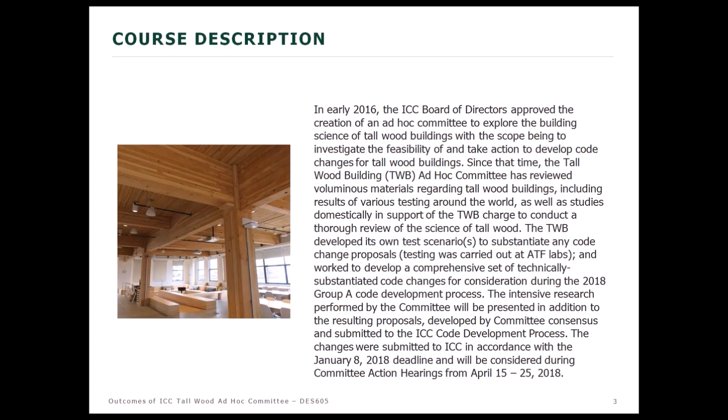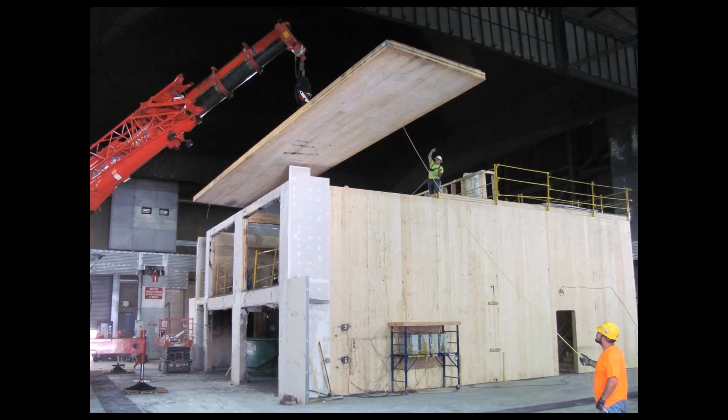And the one shown in the previous slide was a 7-ply CLT slab, about 10.5 inches thick. So they're prefabricated, solid timber slabs that are brought to the site and put into mass timber buildings. I love this photograph of engineers with Lend-Lease Corporation actually setting one of these CLT panels or slabs on top of the test facility, on top of the CLT structure that was tested at the Bureau of Alcohol, Tobacco, and Firearms.

So just a little information about the development of CLT. It is a new product. The important part of the information on this slide is that it really came into use not until after the turn of this century, so in the early 2000s, and its development was driven by environmental advantages of building with wood, carbon sequestration, sustainability, it's a renewable resource, and certain construction efficiencies, better weight to strength ratios, and so forth. There are already over 500 CLT buildings in England, by the way. Far fewer in the US so far.

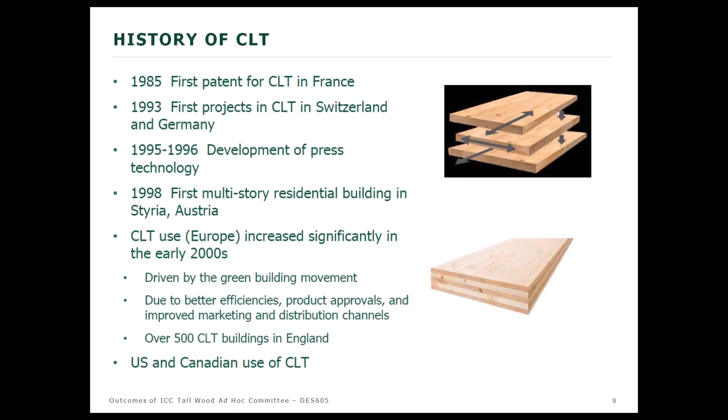Intuitively, the fire resistance of mass timber wall or floor slabs protected with gypsum are going to be much different than repetitive member light frame assemblies. The earliest testing conducted of CLT for an exterior wall confirmed that the fire resistance is very different. One layer of Type X 5/8 inch gypsum on a 3-layer, or I believe 5-layer, CLT panel achieved a 3-hour rating. So you can see how that's very much different than typical light frame or even typical traditional heavy timber.

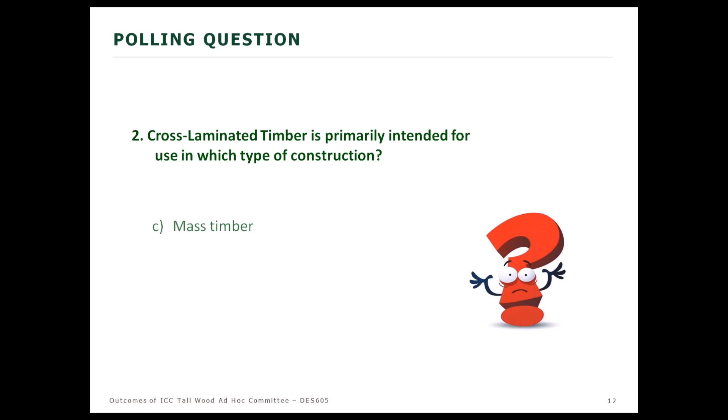I should have mentioned before, Paul's right that the product cross-laminated timber is permitted to be used in type 3, 4, and 5 in various parts of the structure. And in fact, since it's considered heavy timber in the 2018 code - the hearing was in 2015, the code was 2018 - since it's considered heavy timber, there are uses in types 1 and 2 where it can be configured.

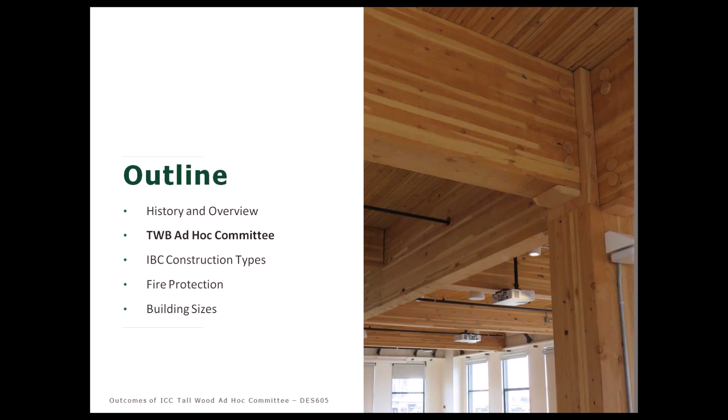However, the Tallwood Ad Hoc Building Committee is what we're here to talk about. The ICC board established this ad hoc back in 2016, frankly at the request of the American Wood Council. We actually made the request much earlier. It went on for quite a while. The committee was appointed in December.

The ad hoc committee was created to study the science of tall buildings of wood construction, look at the data, look at existing examples, and if convinced, take that information and create code change proposals. The ad hoc itself consisted of representatives from building construction materials industries, building and fire code officials, architects and engineers, fire protection experts, and other scientists, researchers, and related stakeholders.

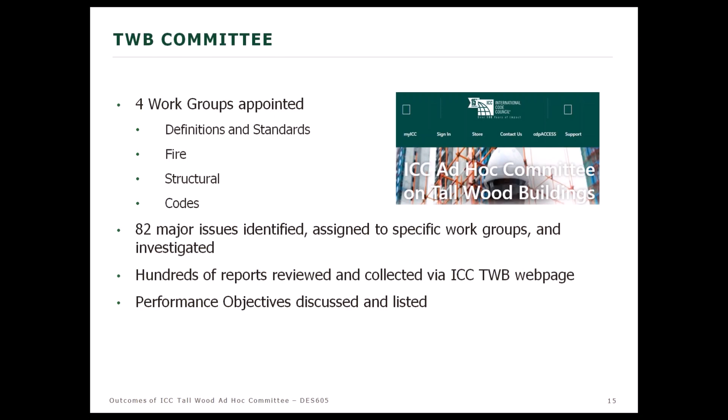And we had presentations for the Tallwood Ad Hoc. And finally, before we got deeply into the data collection and so forth, we had a discussion of performance objectives. What were we going to do? And we identified performance objectives to be met: no collapse under reasonable scenarios of complete burnout.

Complete burnout of the fuel source without automatic sprinkler protection being considered. No unusually high radiation exposure from the subject building to adjoining properties, and no unusual response of the subject building from typical radiation exposure from adjacent properties.

So it should neither transmit nor receive, or behave adversely under normal kinds of exposure. No unusual fire department access issues, internally or externally. Egress systems designed to protect building occupants during design escape time with a safety factor, and highly reliable fire suppression systems to reduce risk of failure during reasonably expected fire scenarios, with reliability proportional to evacuation time.

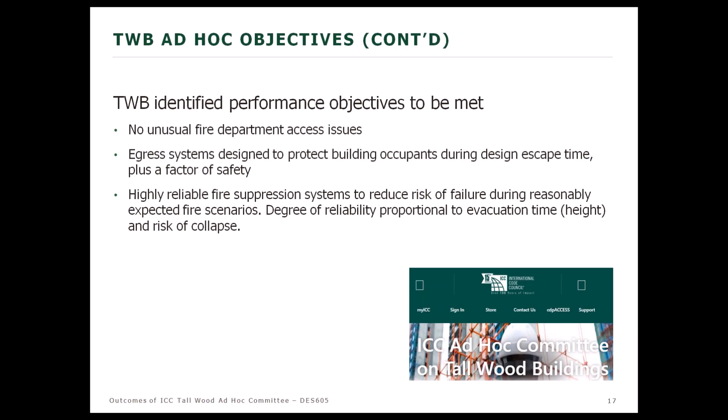Specifically, our biggest concern, and that which we heard from most people about, height. And lastly, risk of collapse. It's important to note the Tall Wood Building Ad-Hoc Committee has determined its comprehensive package of proposals meets these performance objectives. The TWB believes that all of those performance objectives that I just read off are met by this package of proposals. So let's get busy and take a look at some of this.

Before we do, much of the work that Tall Wood Building Ad-Hoc Committee did is predicated upon testing, and among other things, after we reviewed tests by a lot of people, researchers in private industry and in universities around the world, we knew we needed to do our own set of tests. So the fire work group of TWB created a fire test scenario.

A two-story condo, full scale test, 30 by 30 foot interior dimensions, corridor and stairs included. And most importantly, the fuel load was going to be what has come to be known as the UL modern furnishings kind, particularly polyurethane foams and other plastic materials.

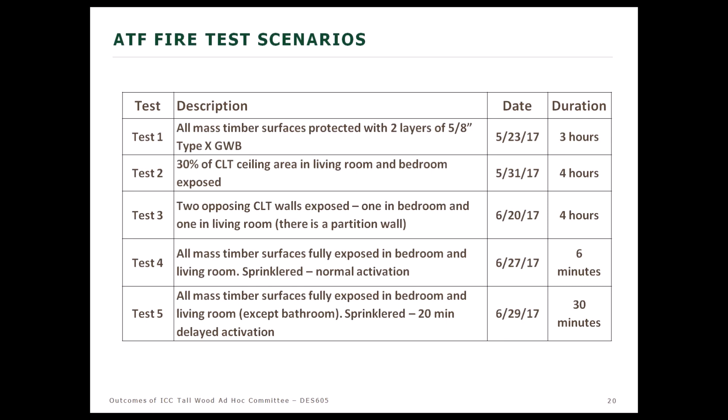So the fire work group created this fire test set of scenarios. You see in this table 5 tests. These outcomes and the program today are predicated on that, and we had hoped that you all would have availed yourselves of the fire test webinar a couple of weeks ago, and the adhesives webinar also a couple of weeks ago. But since we all have real jobs and other commitments, I'm going to review much of it right now. That's why you're seeing the test scenarios.

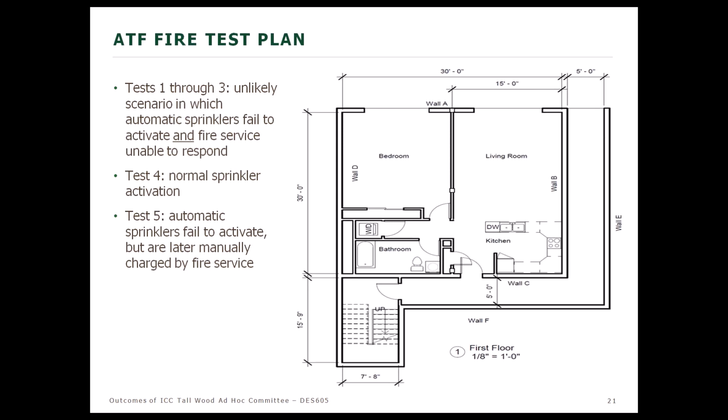Here's the plan, the building plan. This was full scale, so this is a real life example. It's a 1-bedroom condo, 2 stories. There's a corridor around it and a stair connecting the 1st and 2nd floors, both of which were fully instrumented. In fact, we collected, I believe, 420 channels of data. There's a huge amount of data.

If you're a geek and you want to look at that stuff, the report is available on our website, it's the mass timber, awc.org/tall mass timber website. That report's available, look at it. Lots of discussion about all that data. It's an inordinate amount.

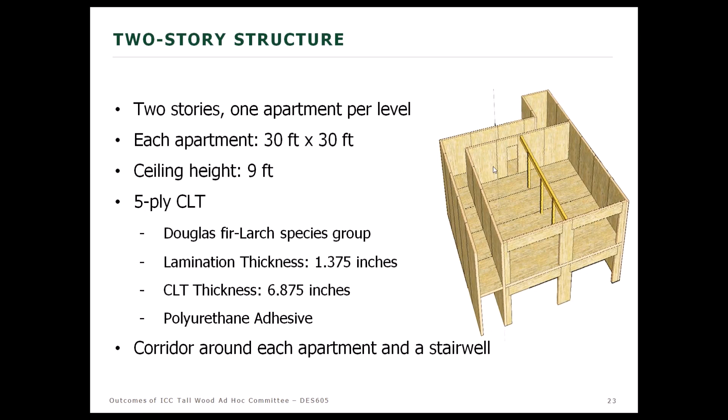In a perspective here, you see panels of CLT constituting walls and floors, but on both the 1st and 2nd floor, there's a center bearing wall, and we used a beam and columns of laminated timber, which is all large enough to qualify as mass timber. So we had all of these kinds of mass timber, and we had different connections that we looked at in that configuration.

So the size, the occupied space is 30 by 30. The kitchen and living room side is 15 by 30, bedroom and bath side 15 by 30. Ironically, later on I'm going to mention the NFPA FPRF tests that were done at NIST, and one of the reasons our size was chosen this way is because the FPRF tests were 15 by 30, so that there's some correlation we could draw.

Everything in that compartment complies with the IBC or code proposals that the Tall Wood Building Ad-Hoc is putting forth. That's an important consideration. For example, there's a 20-minute door from the dwelling unit into the corridor, a 90-minute door at the end of the corridor into the stairwell. All of those issues are dealt with. At one point, we put OSB on top of the non-combustible floor as a floor finish, so that the fuel loads and so forth are all replicated.

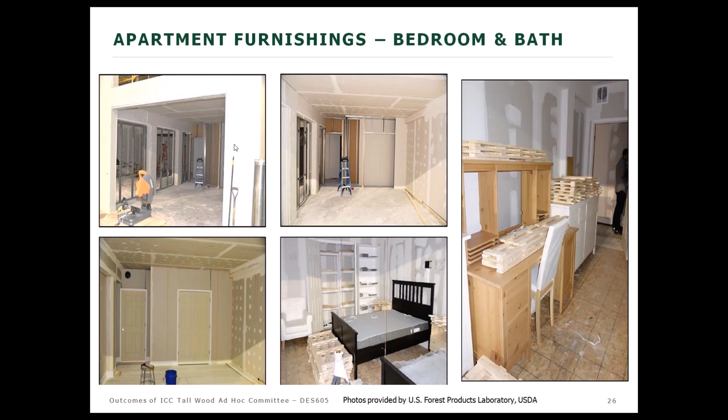Here's the bedroom side. For fire test number 1, all the mass timber surfaces were protected with 2 layers of 5/8 type X. Sam, you're going to go through the 5 tests here.

Sorry to interrupt. You may need to pick and choose which details of each test just to keep us moving.

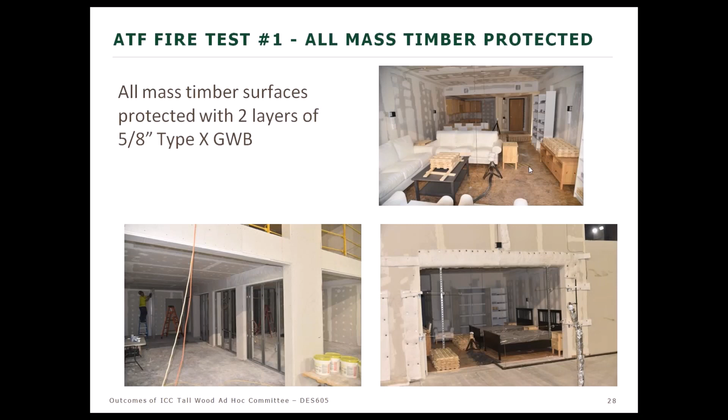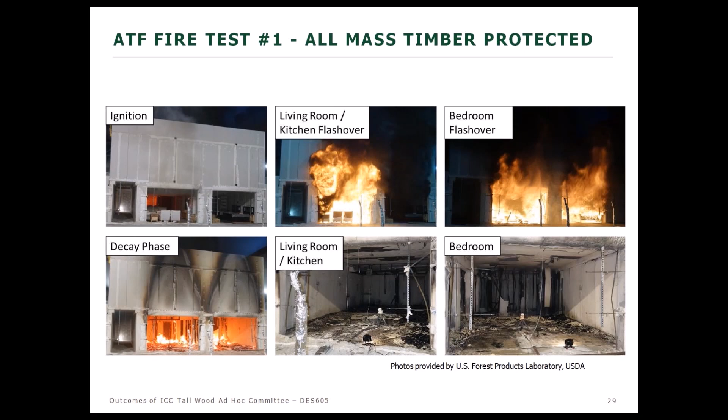No worries. Here we are, this is test 1. There's the 23 megawatt fire when both the bedroom and the living room have flashed over. In the bottom right, you see the fuel was consumed, nothing left but ash and soot. It was allowed to run without intervention by people or sprinklers for 3 hours. That's what was left, and you'll notice the gyp is still attached.

Fire test 2 was one where the ceiling was partially exposed. I failed to mention earlier that on that website, Tall Mass Timber, at awc.org/tallmasstimber, you can find video of all these tests. In fact, you can find the entire fire test presentation that we did a couple of weeks ago.

But I do want to run this, this is fire test number 2. You can see the exposed ceiling right there. There's instrumentation trees there and back there.

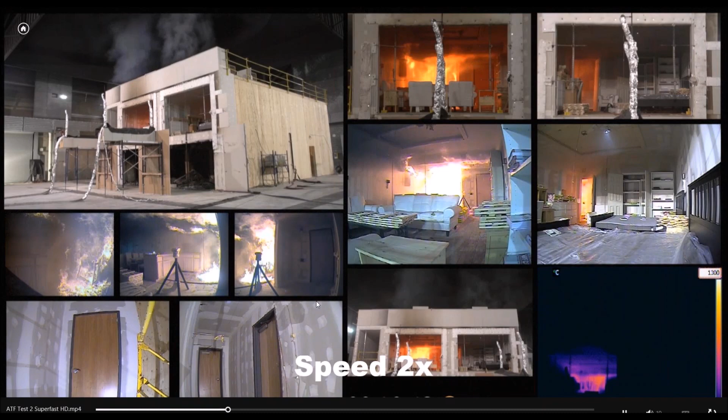Kitchen's involved, the living room about to flash over. Living room has flashed over. The flames have migrated to the bedroom. It's about to go. I'd like to leave it on this for a moment because you get to watch the off-gassing in those urethane mattresses. But let's move ahead. The bedroom, not yet. There it is. Now we're all flashed over.

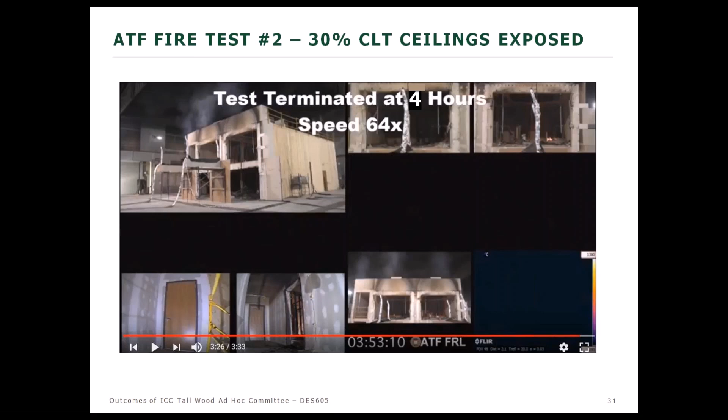In each of these fires, the fire itself at its peak was somewhere between 21 and 23 megawatts. It was allowed to burn itself out without any intervention, no sprinklers, no people, as you can see occurring here. I'm going to advance to the end so we can get through, because I need to get to the end without spending too much time on these things.

By the way, it was loaded with water barrels on the upper level in order to generate the full expected live load. There's the exposed ceiling before the fire.

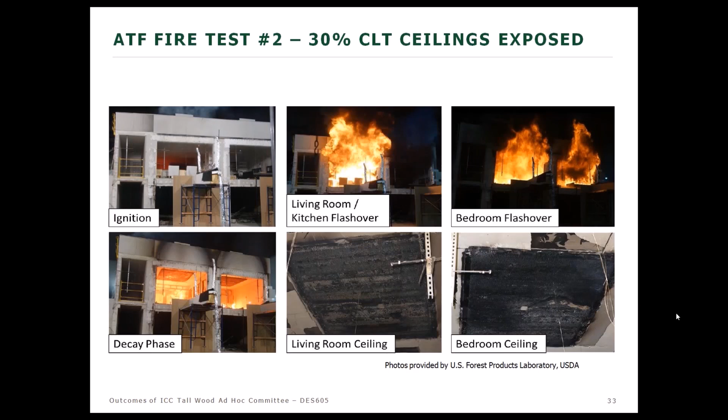Here are the excerpts from that video I just showed you, including some close-ups of those exposed portions of mass timber. Before all of this started, the Research Institutes of Sweden, known as RISE, had gathered data from a number of sources, including that test many of you are familiar with that was conducted at NIST on behalf of FPRF. They had lots of data, and they created a model.

Given our information about the test assembly, their model predicted the heat release rate, the solid black line here. The blue line is what we measured at ATF. This is for test number 2. That's pretty fair correlation.

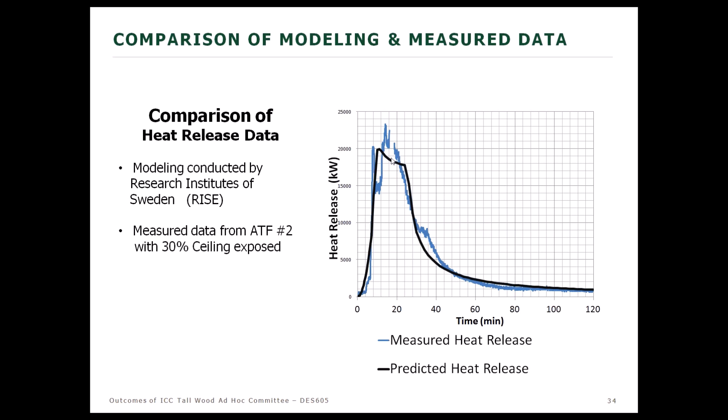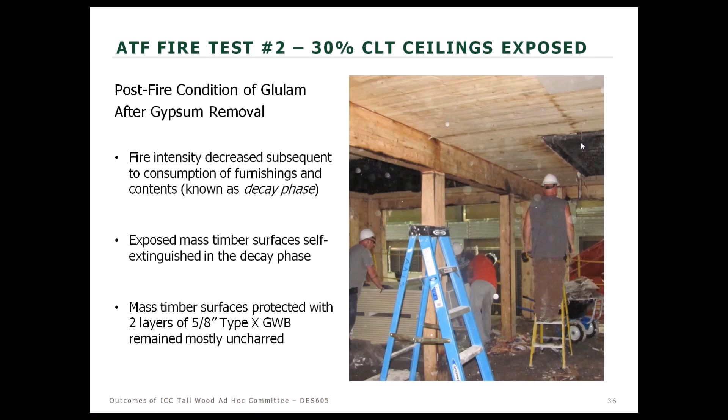So here is that room. This is the bedroom side. That's the kitchen over there with the exposed ceilings. There's that beam and column after that huge fire you saw, with the gypsum removed. So there's the exposed ceiling.

A little better view is pure sideways. Unfortunately, on the ride home from Beltsville, Maryland, it knocked some of that char off. This is the same piece with the char that's been removed by highway oscillation.

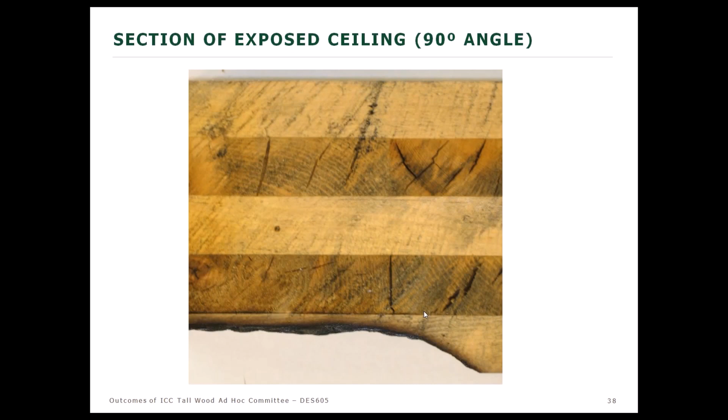And as you can see, the first lam, the char proceeded almost through the first lam. Here's the second lam, third, 5 lam system.

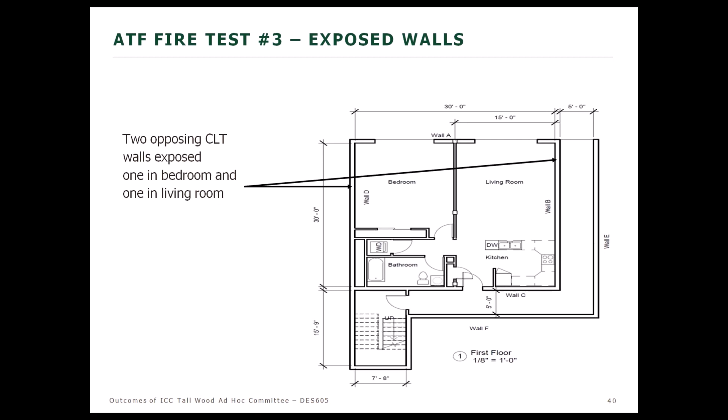Fire test number 3, similar to test 2, only this time the walls were exposed. These are the openings, and the cameras are all set up out here. You're looking in at the outside wall of the living room and the outside wall of the bedroom. This interior partition is the column and beam partition, and those spaces were infilled with non-combustible material, in other words, light gauge steel studs and gypboard.

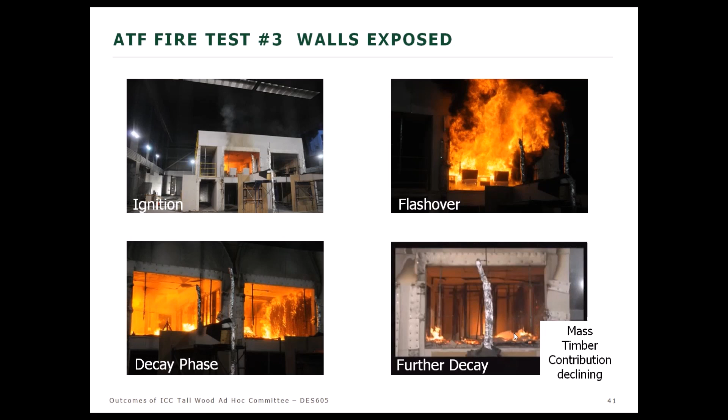Test 3 was run, flashover on both sides. The fire continued to the decay phase, and with the exposed walls, they became involved in the fire, as you can see here. But as the decay proceeded, you'll notice that flame simply diminishes, and our test instrumentation would suggest it continues as far as self-extinguishment, but that's a whole other topic.

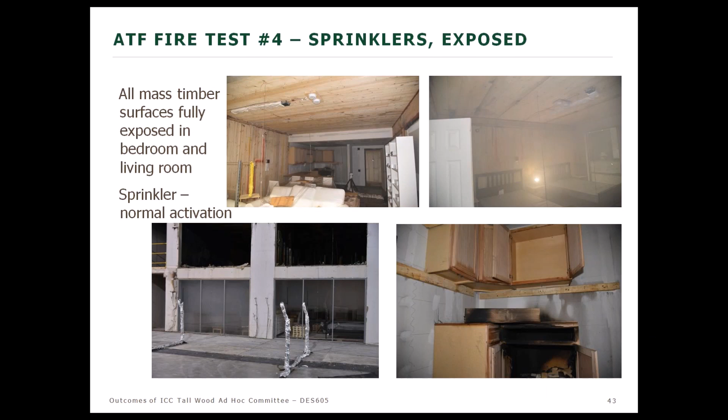It wouldn't have been that bad, except that ATF uses a gasoline-soaked rag in a kitchen cabinet, and then they close one of the two doors. It's a protected fire, so the sprinkler can't get immediately at it. So it's an interesting phenomenon that so little damage was done, even in the case of a protected fire.

Fire test number 5, fully sprinklered, all mass timber surfaces fully exposed. But what if somebody accidentally turned a valve off and the sprinklers didn't work? What happens if all that mass timber gets involved in the fire?

For this test, it was decided that we would install glazing in these openings. So there are 3 panels of glazing, living room side, bedroom side, and the corridor door was left open in order to generate a sufficient amount of oxygen.

But it wasn't growing at a great rate, so at about 17 minutes, the fire service took a pike pole and knocked out the glazing panel here on the lower right-hand side. So the fire then took off.

It got flashover in the kitchen, right at scientific flashover. We had defined flashover, the engineers from FPL and from ATF, as 600 degrees at 4 feet from the ceiling, with more than 2 thermocouples having to register that amount. So anyway, it was near flashover in the living room and in the bedroom.

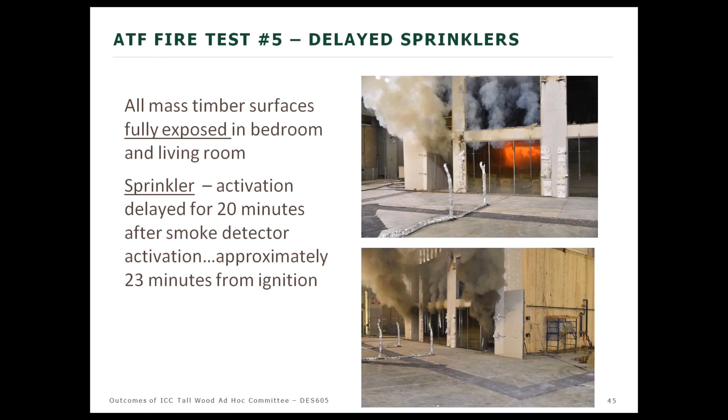Let me back up one here. The fire grew quite large. The sprinklers went off, but they were delayed for 20 minutes after the first sprinkler head would have gone off. The lab valved off the water to those sprinkler heads. 23 minutes after ignition, it was permitted, and the result was it extinguished the fire, even though this was all exposed mass timber, no protection of any kind, and it was allowed to get a pretty healthy start up to around flashover.

So having reviewed that, a poll, if you will, Brian. Which of the following is not one of the tall wood building ad hoc performance objectives? A, no collapse under reasonable fire scenarios. B, no unusual fire department access issues. C, egress systems protect occupants during escape. Or D, occupants protected without leaving the building initially.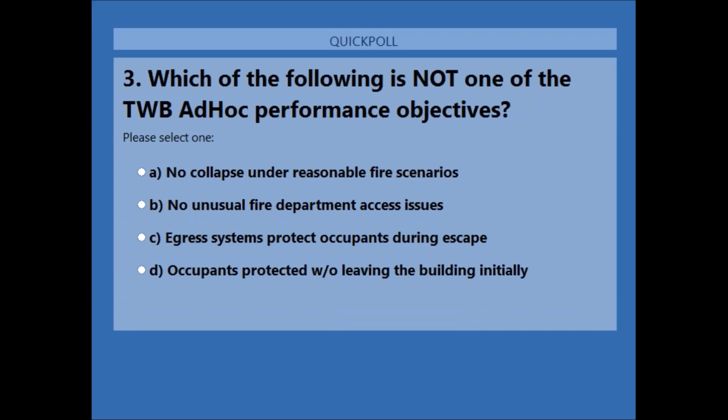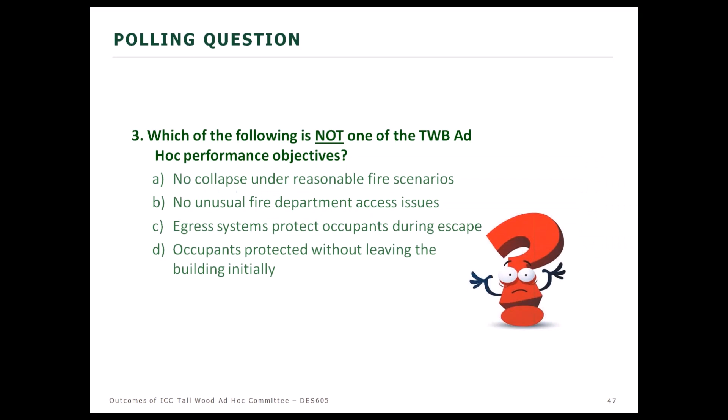I'm going to go a couple more seconds and close it out now. Let's take a look at the results. Looks like most people are leaning towards D, occupants protected without leaving the building initially. What do you say, Sam? Occupants protected without leaving the building initially was not one of the ad hoc's performance objectives.

Okay, so let's look at the types of construction that came from the ICC Tallwood AdHoc Committee's deliberation. There were 15 code change proposals, and we wound up deciding that 3 new types of construction made sense. As a result, there would be new entries for height in feet, height in stories, area, and a whole passel of other requirements for safety, including safety during construction.

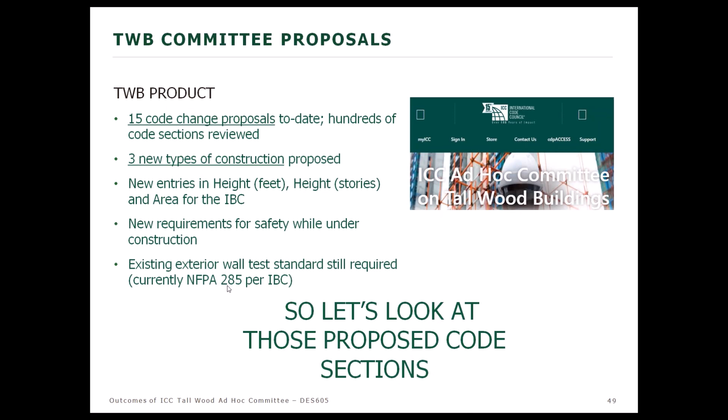I left that a little quickly. I wanted to point out that the fire work group had a subcommittee to look at exterior wall tests. Currently, NFPA 285 is required in 1405 for exterior walls, and for a variety of reasons it was determined by them that the requirement would stay with NFPA 285.

Okay, so the first thing that had to happen was we created some definitions, and like everything else that the work group or the AdHoc worked on, this changed over time. So we had to go back and fix some things, but here are the definitions. First one is mass timber. That's solid built up, panelized, or engineered wood products that meet the minimum cross-section dimensions of type 4 construction.

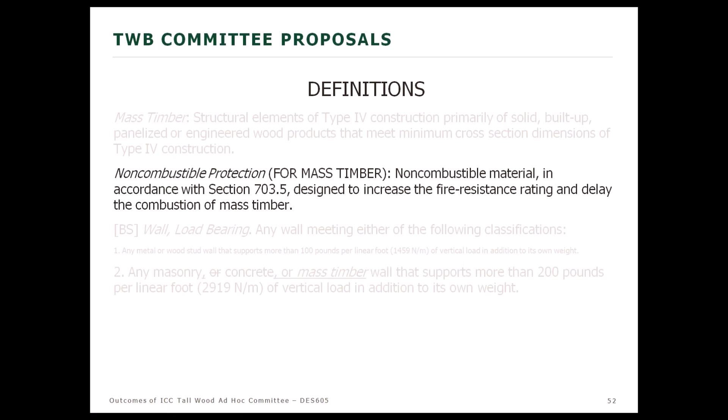Non-combustible protection for mass timber: this is non-combustible material in accordance with 703.5, designed to increase the fire resistance rating and delay the combustion of mass timber. And then we had to add this in because in Table 601, some requirements are for load bearing, some for non-load bearing, so you need to know which is which.

It was determined to add mass timber in definition number 2. The old wood always fell under definition number 1, a wall that supports 100 pounds per lineal foot of vertical load in addition to its own weight. Mass timber got added into number 2, masonry, concrete, or mass timber wall that supports more than 200 pounds per lineal foot of vertical load in addition to its own weight.

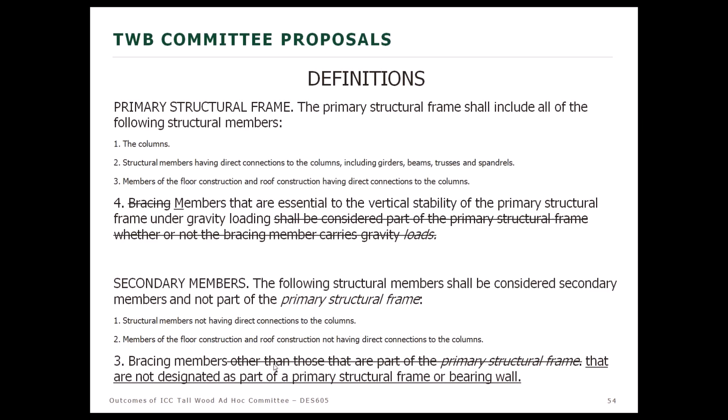And you'll see that the AdHoc drew other comparisons to masonry and concrete. So primary structural frame got modified to accommodate mass timber. Secondary members got modified here in item 3 to accommodate the mass timber. These are proposals - when I say got modified or the table changed, I'm talking about the current existing proposals in G108 that's on the table in the ICC Group A process.

The AdHoc looked at this and said, hey, looking at all this data from around the world and hearing various presentations, that there are basically 3 kinds of mass timber buildings. There's this type, which is where the mass timber is completely protected with non-combustible protection, which provides 2/3 of its required fire resistance rating for building elements in Table 601. We called that 4A.

Then 4B is mass timber with portions of that type A protection omitted. 4B is like 4A, but unprotected areas are permitted. There are limits on how much can be exposed and limits on how close various exposed areas can be to one another. Then there's 4C, with basically no requirement for non-combustible protection except certain features I'll touch on later.

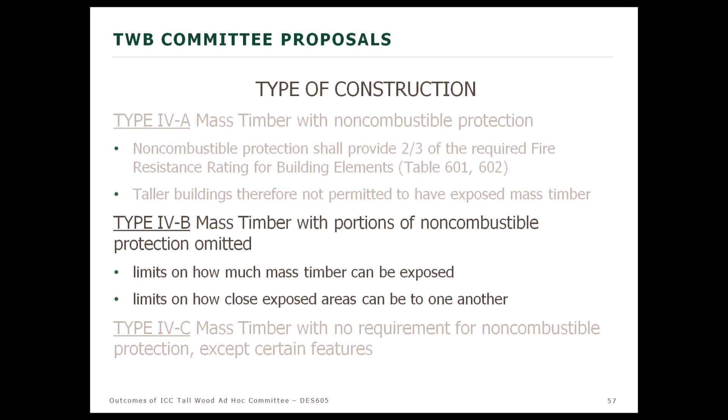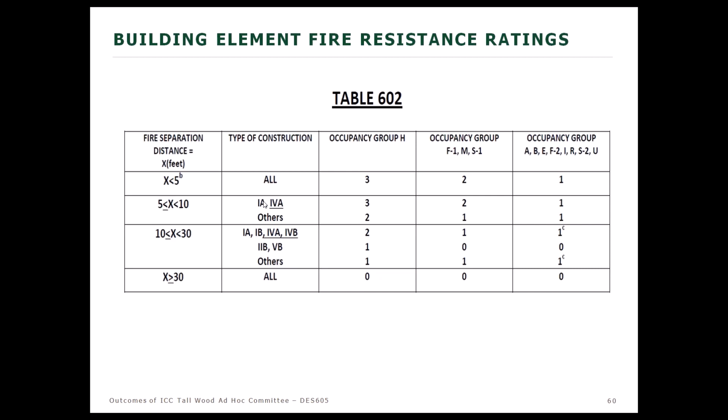Table 602 - bearing in mind the 4B, 1B relationship, we went to the table here, 602, and said okay, wherever 1B appears we'll add 4B, wherever 1A appears we'll add 4A, as is the case in these two lines. That was the basic premise from which all of the Tallwood building AdHoc work sprang - that 4B was equivalent to 1B, except that 4B is combustible material and accommodations need to be put in place to accommodate that particular aspect.

All right, so other important features: each type of construction is based on test conditions in that fire test that we looked at back there at ATF. The test plan was developed by the Tallwood Building Fire Work Group. The test plan included various generic connections that were recommended by the structural work group to be tested - I think there were 7 generic kinds of connectors in that test. And lastly, both panel mass timber, CLT, and other mass timber, glulam beams and columns, were tested.

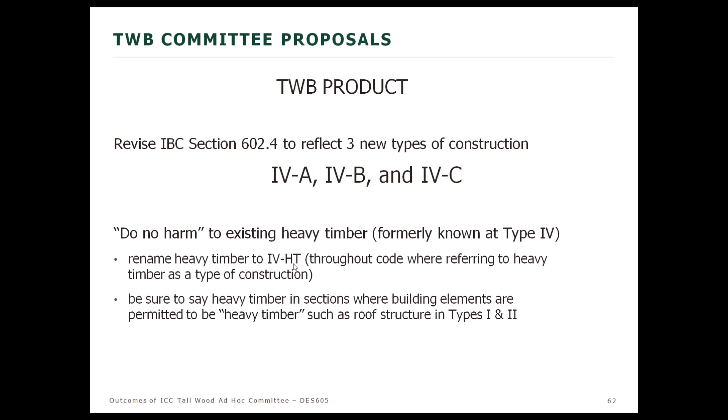So the first thing in the product of the ad hoc is do no harm to the existing heavy timber requirements. The old 602.4, which was just heavy timber, became 602.4.4 in the new scheme and is called type 4 HT. The intention is to do no harm to that. It stays the same now as it was in the past.

Mass timber elements have non-combustible protection. Mass timber elements shall have a fire resistance rating shown in table 601 and 602.

CLT elements shall be tested and labeled for heat performing adhesives. That's built into the code language, and in fact it led to a change in the product standard PRG 320. You're welcome to go to our website and watch the seminar on adhesives to learn all about the fire testing and background of the 2 tests now required for all elements that must be tested and labeled for heat performing adhesives.

And lastly, all building elements, load bearing and non-load bearing alike, must be mass timber or non-combustible. No combustible light frame construction, nowhere, no time.

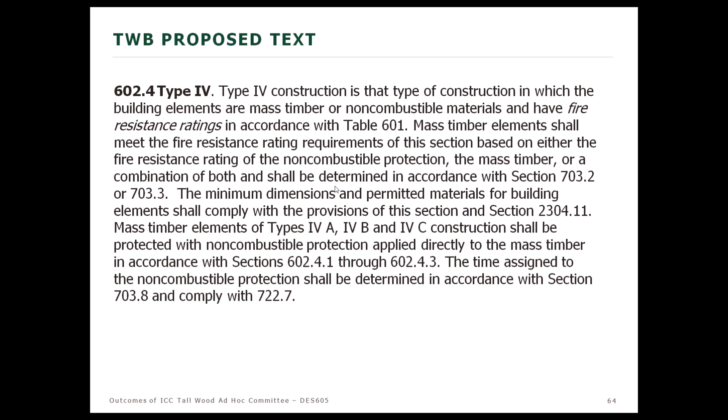So here's the proposed text, the actual language submitted by the AdHoc. I'm going to just scroll through here pretty quickly. Here's the existing language at the top on heat performance, and currently it refers to section 6.1.3.4 of DOC PS1.

But the AdHoc has an amendment, a proposed amendment, because of the work that the industry did, coming up with 2 new tests that better define heat performance, and we'll propose to substitute that in here, but it'll be part of the requirement that it's tested and labeled for that.

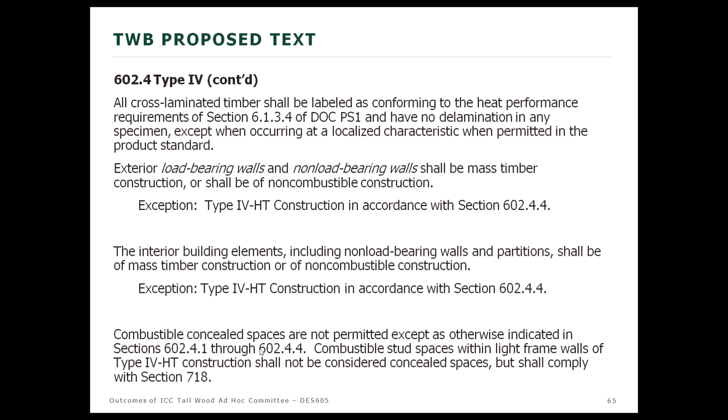Exterior load-bearing, non-load-bearing walls shall be mass timber or non-combustible. Interior building elements, including non-load-bearing walls and partitions, shall be mass timber or non-combustible construction. Nowhere does it permit light frame, I'm sorry, combustible light frame construction. Concealed spaces are not permitted except as otherwise indicated.

We'll come to that. In the high-rise buildings, exit enclosures and elevator hoistways may be mass timber or non-combustible. Remember, in 403, high-rise is a building with a floor level 75 feet or more above the lowest level of fire department access. In type 4A, or in buildings of height permitted by 4A, is really what that should say.

Exit enclosures and elevator hoistways must be non-combustible construction. So in the tallest of the buildings, we're contemplating exit enclosures and elevator hoistways must be constructed from non-combustible materials. Here is that spelled out in language.

Okay, we have 3 types of construction, 4A, 4B, 4C, that are being proposed to be added to 602.4. And in 4A, this is the highest form, all mass timber must be protected, interior and exterior. Non-combustible protection must constitute 2/3 of the required fire resistance rating, but not less than 80 minutes in the interior and not less than 40 minutes on the exterior. Floors must all have a minimum of 1-inch non-combustible material on top of the mass timber.

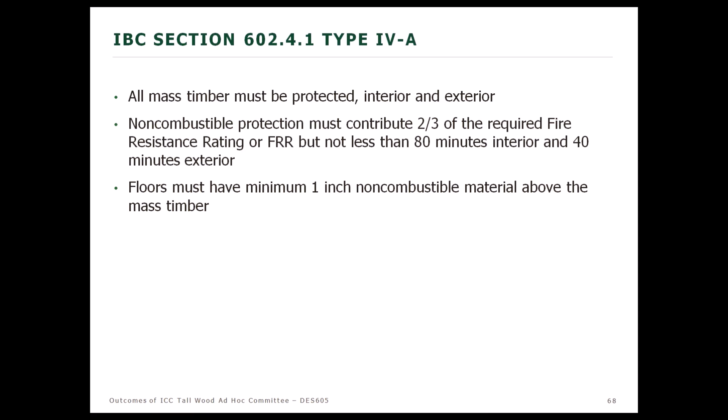So not 2/3 of the non-combustible protection time. If you take a look here at bearing walls in 4A, that's 3 hours. 2/3 of that is 2 hours. And in the Tallwood AdHoc proposal, 722.7.1, fire resistance rating of a building element in table 601 or 602, 2 hours means a minimum non-combustible protection time of 80 minutes.

Interestingly enough, if you look at the next table, type 5/8, a 5/8 type X gyp board is assigned a protection time of 40 minutes. We'll also submit, by the way, a modification to change this 1/2-inch type X from 30 to 25 so as to be consistent with an entry that already exists in another place in the code. It's unlikely to be used, but 40 minutes, the 5/8 type X is common. And so it's ironic that the 40 minutes turns out to be exactly 2/3 of an hour. What that means is for every hour of fire resistance rating, you need one more layer of 5/8 type X gyp board.

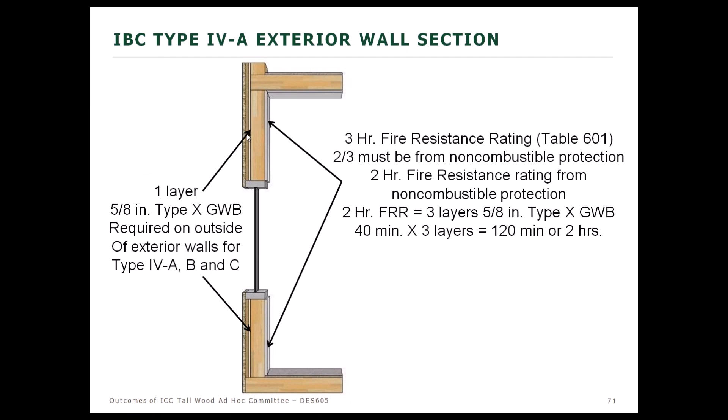And more importantly, in that section, the outside face of that wall, the mass timber shall be protected with non-combustible protection with a minimum assigned time of 40 minutes. All components of the exterior wall covering shall be non-combustible material except water resistive barriers having, and it spells out the special characteristics for the water resistive barrier. It's taken straight out of 1405.

So here's the definition of exterior wall covering: a material or assembly of materials applied on the exterior side of exterior walls for the purpose of providing a weather resistive barrier, insulation, or for aesthetics, including but not limited to veneers, sidings, exterior insulation and finish systems, architectural trim and embellishments such as cornice soffits, fascias, gutters, and leaders. Everything on the outside, outboard of that water barrier must be non-combustible.

This is the code language. The rest of it covers interior protection time and the floors. Back to that drawing, the outside has to be covered, has to be non-combustible. Everything outboard from the mass timber gets a water resistive barrier applied to it. So there will be the mass timber and the non-combustible protection, that 5/8 type X, a water resistive barrier, and then insulation, cladding, and so forth. Everything outboard from there is non-combustible.

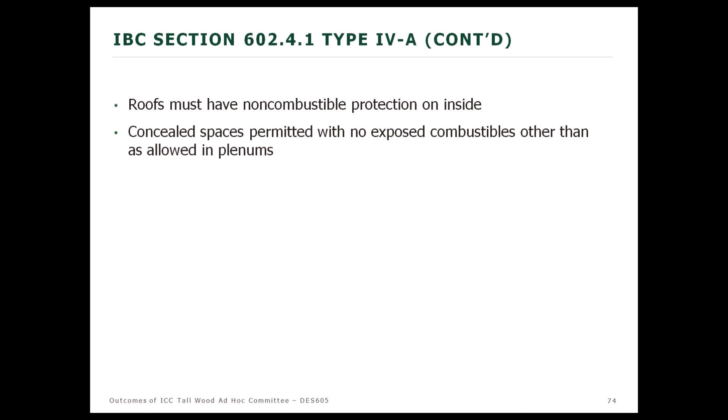Here's the language, I'll call your attention to it. Concealed spaces shall not contain combustibles other than electrical, mechanical, fire protection, or plumbing material and equipment permitted in plenums in accordance with 602 of the International Mechanical Code. Combustible construction forming concealed spaces shall be protected in accordance with 602.4.1.2.

That's the one back there that tells you I need 2/3 of the 3 hours for vertical, and the floor in a type 4A is a 2-hour, so I need 2 layers of gypsum protecting it. Shafts are permitted in accordance with 713 and 718. Both the shaft side and the room side of mass timber elements shall be protected in accordance with 602.4.1.2.

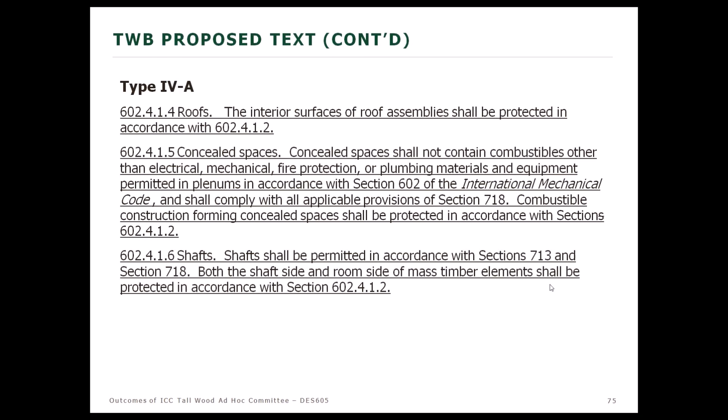So let's look at 4B. 4B is the same as 4A except for a couple of things. The exterior is the same 40-minute requirement. The interior is the same except unprotected portions are permitted. The floors have the same 1-inch requirement. The roofs have the same protection. Concealed spaces have the same must-be-protected requirement, and shafts have the same requirement as 4A.

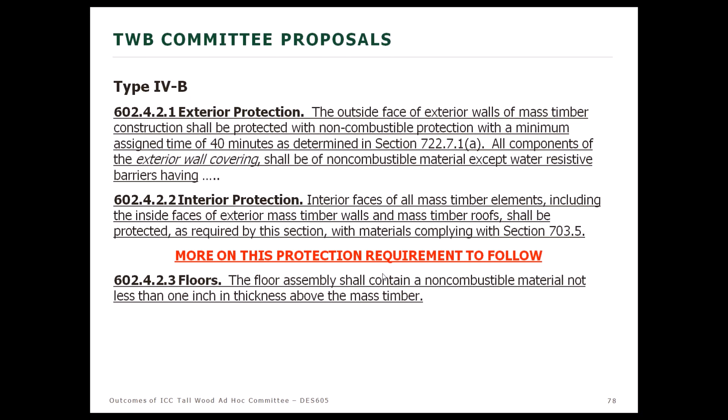So what's the exterior protection? Well, that's that 40 minutes I mentioned, one layer of 5/8 type X in the prescriptive path. Interior faces have to be protected except where permitted, and there's more about that to follow. Floors have the same non-combustible requirement. So here in a type B, here's our exterior wall, but now that wall is a 2-hour fire resistance rating, and that means 2 layers of 5/8 type X on the inside. And remember, all of them - 4A, 4B, and 4C - have 1 layer of 5/8 type X required on the outside.

Everything after that water resistive barrier over the gypsum, over the mass timber, everything outboard of that has to be non-combustible. Everything.

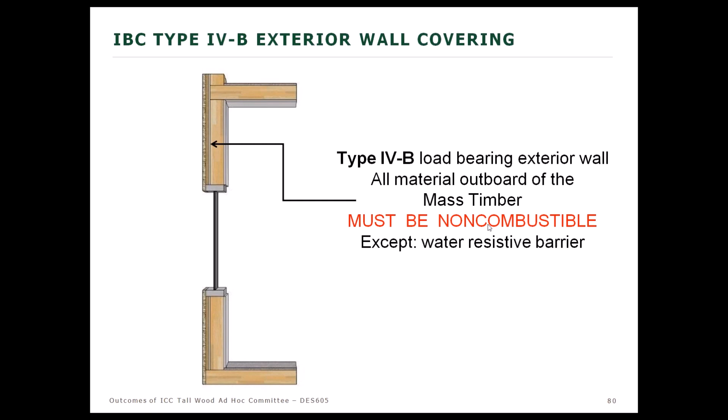So roofs also have to have protection on the underside. Concealed spaces are permitted with the same materials permitted, and combustible construction forming concealed spaces have to be protected in accordance with 602.4.1.2. Shafts are permitted, and both the room side and the shaft side of mass timber has to be protected with that non-combustible protection. In other words, this is 4B where some exposed is permitted, but it can't be a wall common to a shaft, or, you'll see later, an occupancy separation.

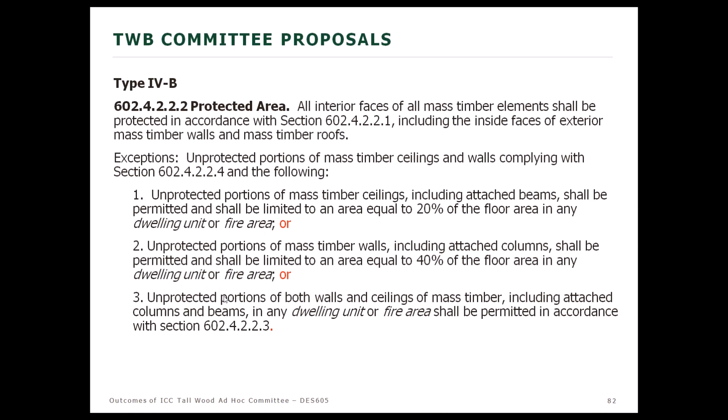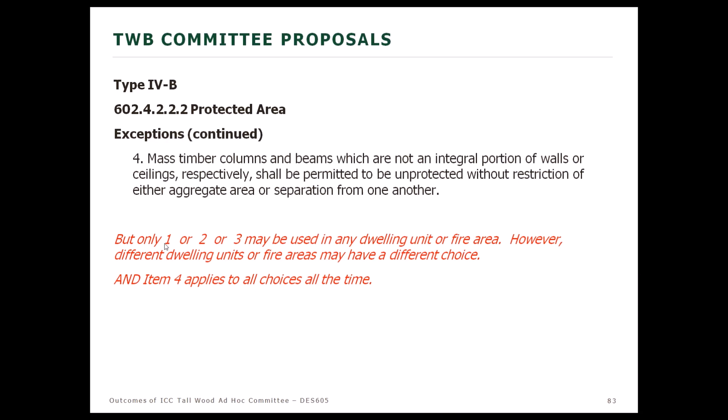Okay, what is that permitted unprotected area? We can do 4 things. Everything has to be protected with the following exceptions: unprotected portions of ceilings equal to 20% of the floor area, or 40% of the floor area as unprotected walls, or portions of both walls and ceilings in accordance with this section. And then number 4 - so you have to do 1 or 2 or 3, and in all cases number 4 applies - mass timber columns and beams which are not integral to the walls or ceilings respectively shall be permitted to be unprotected. So you do 1 or 2 or 3, and 4 always applies.

And what is that number 3? Well, here's how I determine how much of each I can have. This is, if you don't recognize it, stolen straight from the separated mixed use sum of the ratios equation.

It's simple: the ceiling area divided by the allowable maximum ceiling area, plus the wall area divided by the maximum allowable wall area. The sum of the ratios must be equal to or less than 1. Straightforward. There's a couple of other caveats on that.

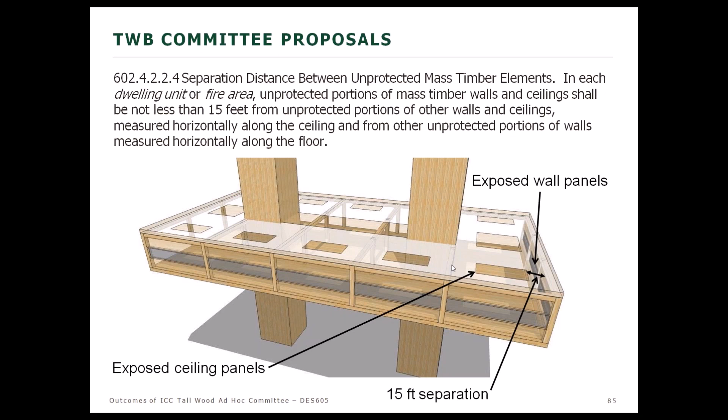For example, if you have a little bit of ceiling and a little bit of wall, there has to be a 15-foot separation between them of protected portions. If you have two ceiling areas unprotected, there needs to be 15 feet of separation.

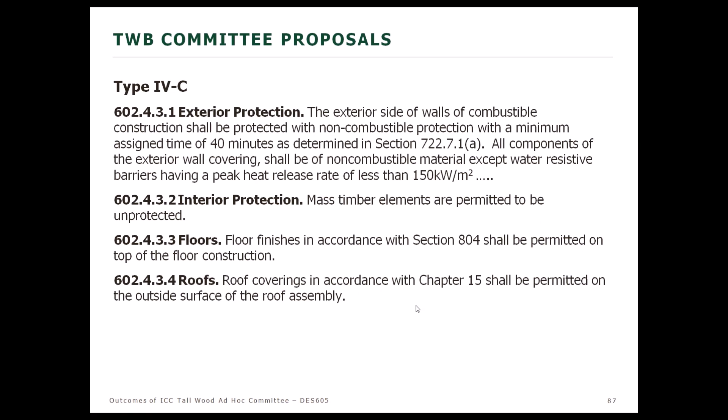So on our 4C wall, this can all be exposed, no requirement for protection. On the outside, one layer 5/8 type X, the actual requirement is non-combustible protection of 40 minutes, and a water resistive barrier. Outboard from those, it must all be non-combustible. So on 4C, where you don't have to protect anything on the inside face, you have to protect everything on the outside face.

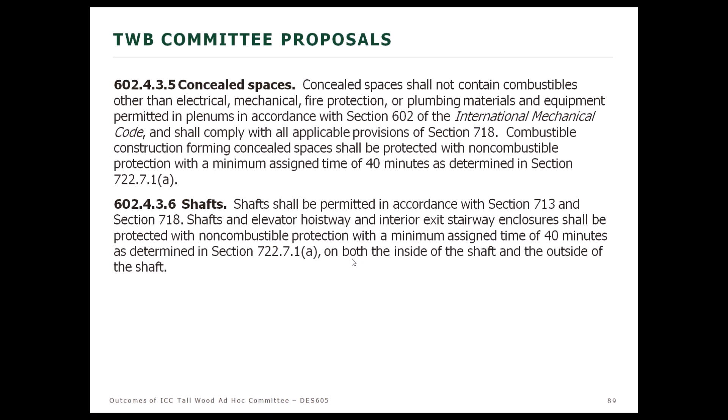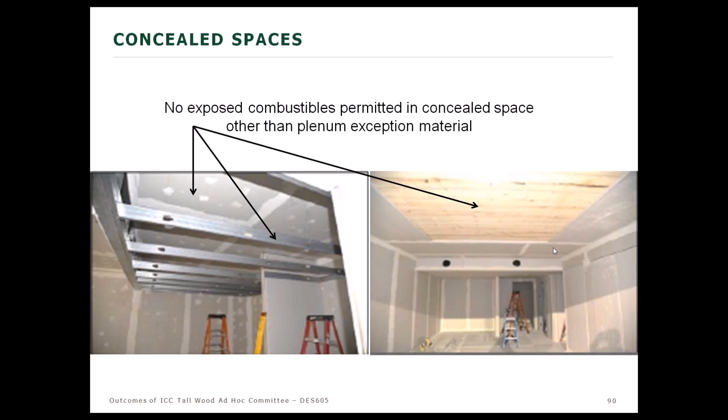Concealed spaces in 4C are similar to those in 4A and B, in that combustible construction must be protected. Even in 4C, shafts must be protected both in the shaftway and on the inside wall. And there's our drawing again of non-combustible construction forming a concealed space, no exposed material permitted.

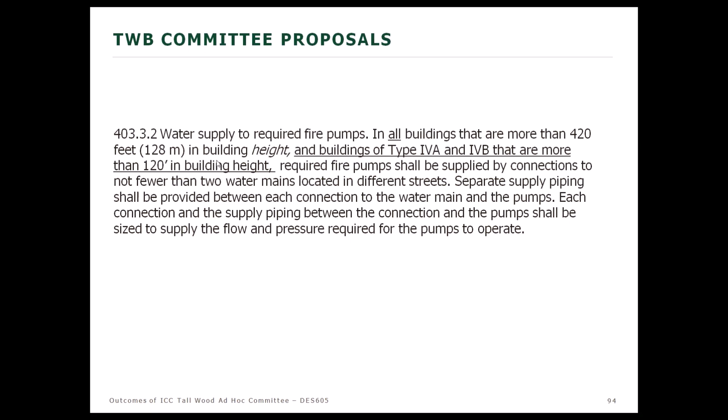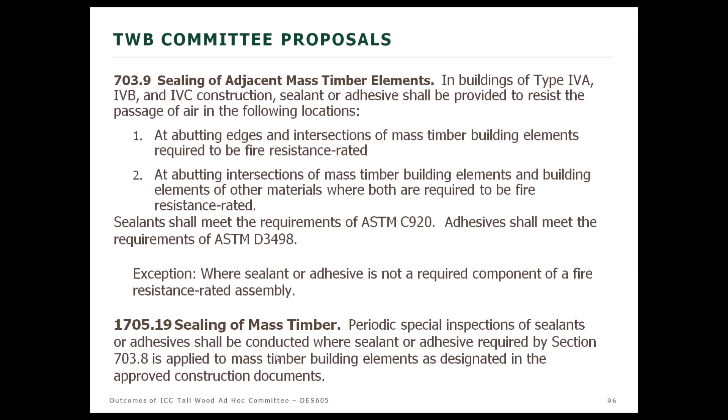The fire resistance, that's straightforward. Of course, in the IBC, it says right in the front of Chapter 7, all fire resistance rating is based upon E119 test concepts. But there are 7 methods of determining fire resistance, and in the case of mass timber, in the front of Chapter 7, the National Design Specification for Wood Construction, NDS, is referenced, and Chapter 16 has, among other things, a calculated fire resistance section. So one can do that, or one can look at an E119 test.

There are, you can go to an accredited agency, like go to UL and look in their directory.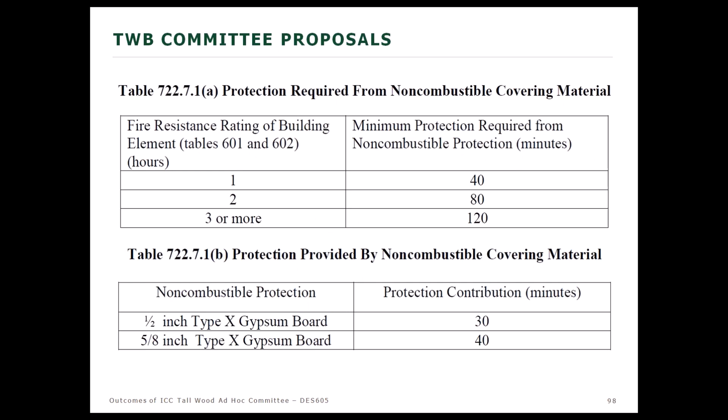Minimum protection, these are all concepts I've touched on. There are the requirements. This is the prescriptive non-combustible protection back in 722.7. But as I said, there are complete details on fastening, offsetting panel edges so that the joints don't line up, how far apart, how screws need to be staggered so that each layer is fastened in a different place, and so on and so forth.

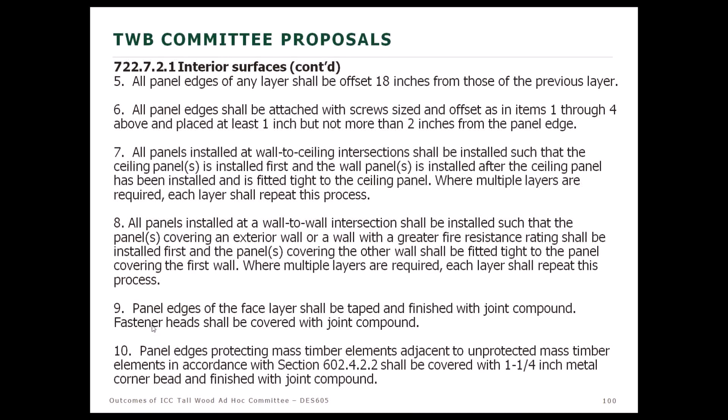The same thing applies back there for exterior surfaces.

In addition, in the fire code, there's a section on owner responsibility, and this will add in the owner responsibility for those who forget. The owner responsibility is to maintain an inventory of all required fire resistance rated construction installed to resist the passage of smoke and so forth.

And we're adding sections 602.4.1 and 602.4.2 so that the owner will need to keep an inventory of that. This is where non-combustible protection is applied to mass timber.

And further down here, the owner is responsible to annually conduct a visual inspection and keep a log of properly repaired, restored, or replaced items. That's new with it. It's the owner's responsibility exists. We've added, or are proposing to add, those requirements for the protected mass timber.

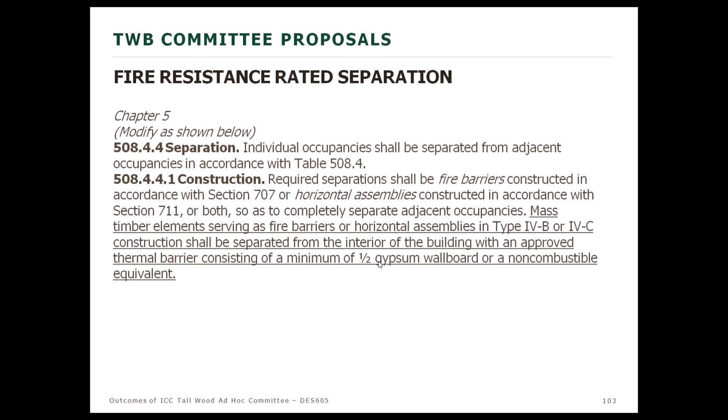Okay, so we got some other things. There's where the mass timber is used as occupancy separation. The short version of this is that mass timber must be covered with an approved thermal barrier of at least 1/2 inch gypsum wallboard or other non-combustible material.

Same thing applies to other occupancy separations.

So I've covered the owner's responsibility. One of the things that is unique to this is that as the building construction progresses, standpipes are required to be provided, water supply is required to be present, one layer of non-combustible protection if required. That means in the case of 4B, where unprotected areas are permitted, you don't have to protect them and then remove it later. So required non-combustible protection needs to be applied on all mass timber elements more than 4 stories below the uppermost floor under construction.

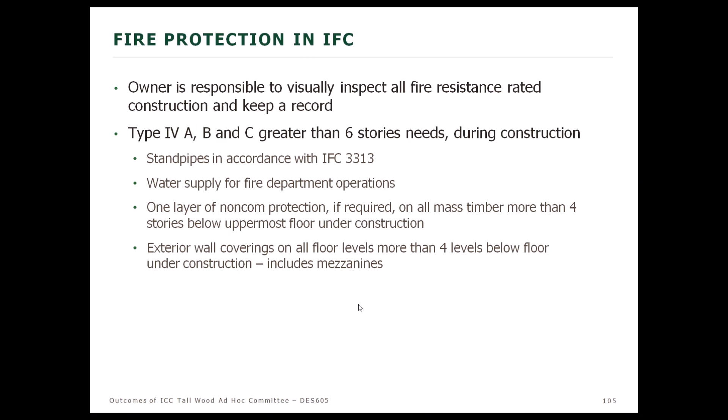Exterior wall coverings on all floors more than 4 levels below the floor under construction. And we said levels there because we meant to include mezzanines. If you have 2 floors, each of which has a mezzanine, then the number is 2 floors with 2 mezzanines below the level of active construction need to have the exterior wall covering.

Okay, so in the IFC, it's further proposed, for example, standpipes provided during construction, water supply I mentioned, and I just covered those couple of conditions where interior non-combustible protection and exterior protection need to come up to be within 4 floors of the active work floor.

So what that means is, as you start out, when you get up to level 6, you need to have 2 levels protected to be within 4 floors of the active work floor. And as you go up, that has to follow along, interior and exterior.

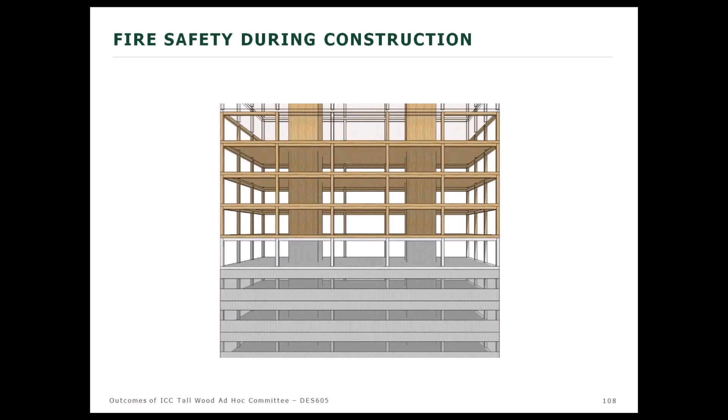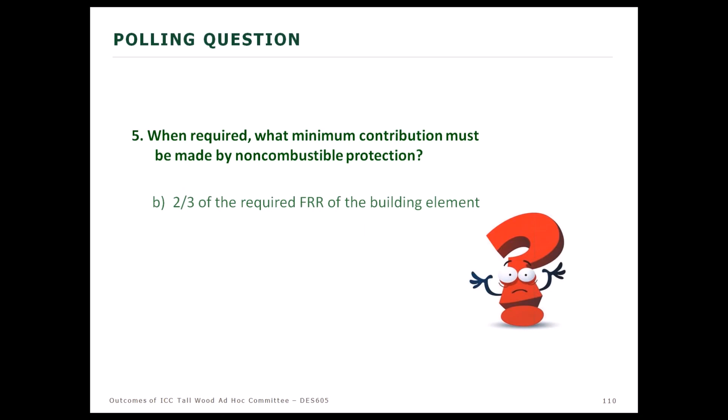That's an easy one. The minimum contribution is 2/3 of the required fire resistance rating.

4C, maximum height in feet is 85. Maximum number of stories, for use group B, is 9. All the mass timber, with certain exceptions like concealed spaces, can be exposed. It's anticipated to be sprinklered. Primary frame 2 hours, floor rating 2 hours, and so on.

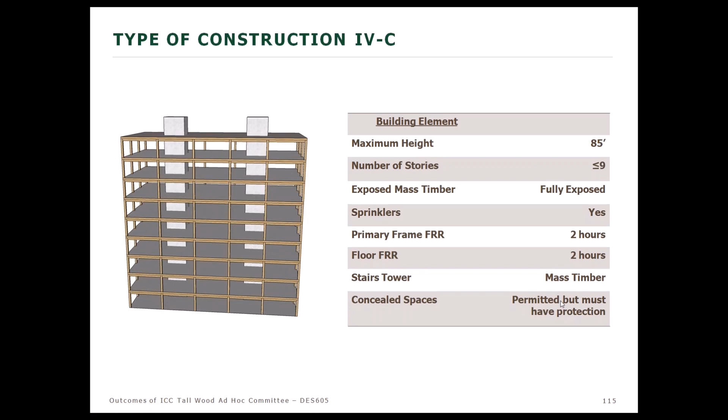Okay, type 4B, maximum height 180 feet or 12 stories. There can be partial unprotected area, sprinklered, 2 hour frame, 2 hour floor, 80 minutes minimum non-combustible protection.

Because we're under 180 feet or 12 stories, we can have stair and elevator shafts of mass timber or non-combustible. But when we get to 4A, where that may be 270 feet and group B can be 18 stories, sprinklered, 3 hour frame, 2 hour floor, 120 minute minimum protection, and so forth.

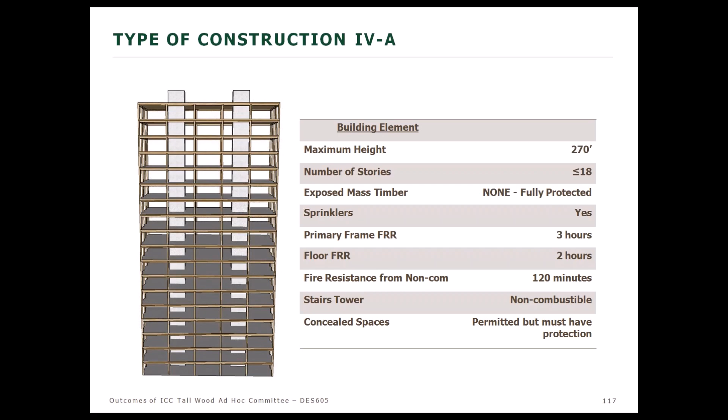But the stair towers and elevator hoistways have to be non-combustible construction. Concealed spaces are permitted in each of them, but no exposed combustible material is permitted in any of the 3 proposed types of construction. So let's take a quick look.

Allowable number of stories - I mentioned B before. So here you see 18 is the maximum number of stories in any of these 3 new types of construction, 4A, 4B, 4C, across 27 occupancy classes with subcategories. 11% of them are 18. There are more classes that permit 3 stories or less than those which permit 18 stories.

So we went through - let me back up one quickly. In order to achieve these numbers of stories, it was begun with a look at 4C and increased based upon professional engineering judgment. In many cases the numbers have been reduced.

If you look at the H's and the I's in particular, you'll see they're very small, and they were almost all reduced to the same level as is currently permitted in type 4. So H and I was reduced almost all to that level.

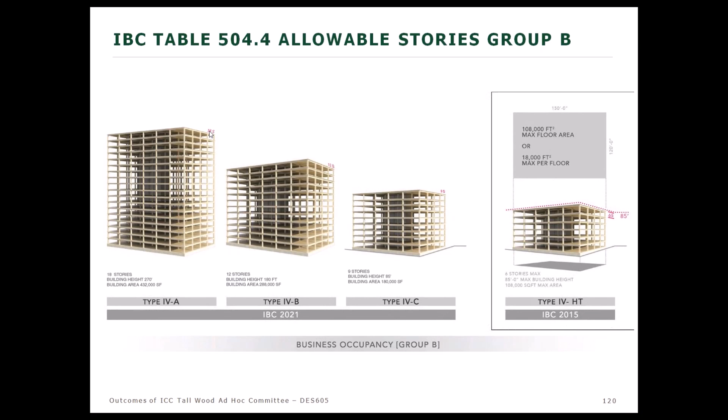Existing, here's group B, existing HT, you're allowed 85 feet and 6 stories. The new proposed 4C, you're allowed 85 feet and 9 stories if you're clever enough to fit it in. 4B, you're allowed 180 feet and 12 stories. And in the 4A, fully protected, it's 270 feet and 18 stories. Those are the maximums. Here's the height in feet chart.

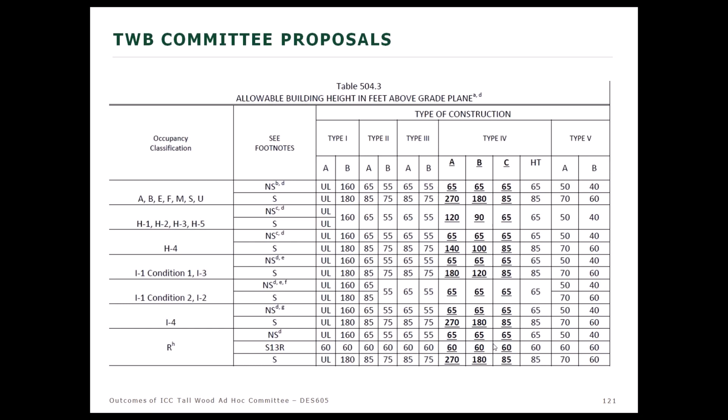And remember, perhaps I didn't say it yet, but the group decided that 4B, in all ways other than the combustibility of the material, was equivalent both mechanically and fire to 1B. So you'll notice that those numbers are the same all the way down, 1B and 4B. We couldn't do that with 1A because that's all unlimited, and we weren't going there, that's for sure. So we simply increased it mostly by 50%, but in some cases by considerably less.

And then area, in this case, we could not rely upon our 4B is equivalent to 1B because 1B is all unlimited. So we took HT and increased it by 25% to get 4C, by 2 times to get 4B, and 3 times to get 4A.

Then we went through cell by cell, took a look and said, should this be allowed to stand? Isn't something like H2, isn't that kind of big? And so once again, it's limited to whatever the old HT was limited to. In many cases, all the way down through the H's and the I's, you'll find it to be the same, where it's limited to what old HT was limited to.

R's, different matter - the ratios applied. So you look at that and you say, gee, sprinklered multi-story 4A, that can be 184,500 square feet. Yeah, it can, but I can multiply that by 3 stories, but then if I'm building an 18-story building, I divide that answer by 18. So I'm going to get somewhere around 30,000 per floor, not 184,000.

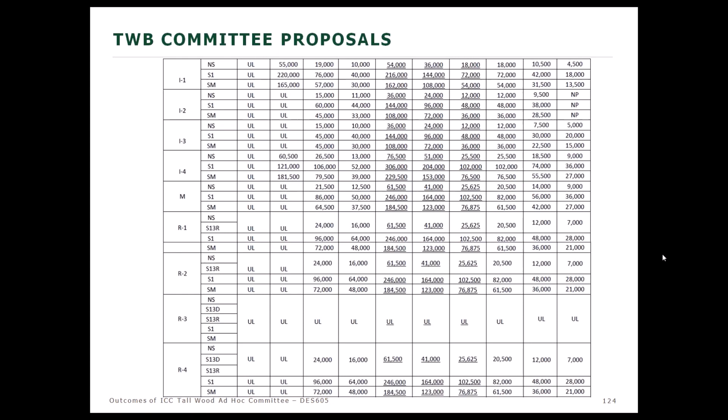It's deceiving - remember the formulae that ICC employs to get building allowable height and areas. And last, well, nearly last, is all of our changes listed one by one, including the changes proposed to fire districts and owner responsibility.

And a last polling question, which is true regarding maximum height. I presume that because I'm so far behind, I'm going to just go ahead and answer it. Go ahead and put the poll up.

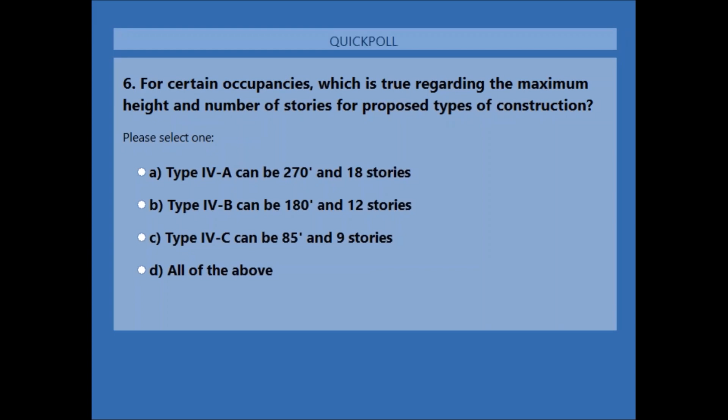We can actually take this one, Sam. Yeah, put the poll up. I've already answered it. Oh, you did? Oop, sorry, I missed it. It's a gimme, let them have it. Here we go. All right, looks like everybody answered all of the above. So there you go, Sam. Yeah, after I underlined it. That's pretty good. All right, I missed it, that's okay. Back to you.

Hey, I'll just say we're going to take some questions. Such great information, Sam, and we've got a lot of good questions that came in. So could you talk a little bit about, there was a lot of emphasis on non-combustible protection for these combustible building elements. Can you talk about the ratings and how that's distinguished? For instance, you said type 4C, no non-combustible protection required. What is the safety element then in the fire resistance rating? How is that taken into account?

All of the building elements have a required fire resistance rating. If you look at table 601, primary structural frame, bearing and non-bearing walls, floors, and so forth, they each have a fire resistance rating. At the beginning of chapter 7 in the IBC, it says specifically that however you determine the fire resistance rating, it has to be based upon E119. So the first and easiest way to accomplish that is by testing according to E119. That's not the only way. And you need to look at those entries up there in the beginning of chapter 7. But essentially, whether it's calculated or it's determined by fire testing, it's still done with the E119 basis at its heart.

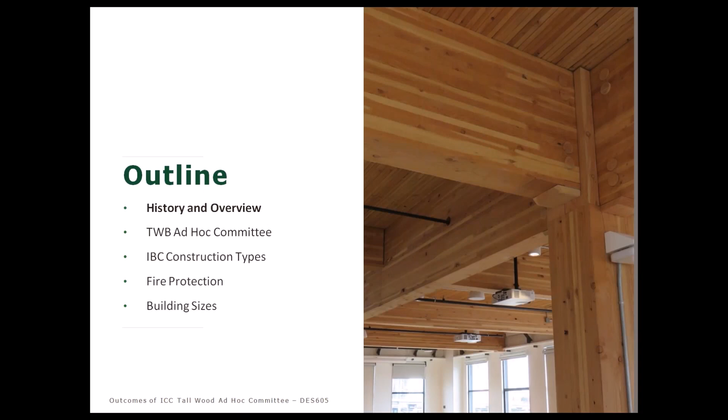You can try. I think you still have control, Sam. There you go. Yeah, let me see if I can get to it quickly. Next one. There it is.

So there actually are 3. NIST has one, UL has one, and ATF has one. NIST was tied up. UL had to use a hybrid kind of system. ATF had a hood big enough and a lab space big enough. That's how, no other reason. I wanted to go to NIST to do the testing in their lab, but they could not free up the lab in the time constraints that we had.

Very good. Hey, Sam, was the structure used over again between tests, and how did that work? Yeah, that's the same structure. We did the first 2 tests on the second story and then replaced the roof panels because it was a lot quicker to do it with that crane. And then we did the next set of tests on the first floor.